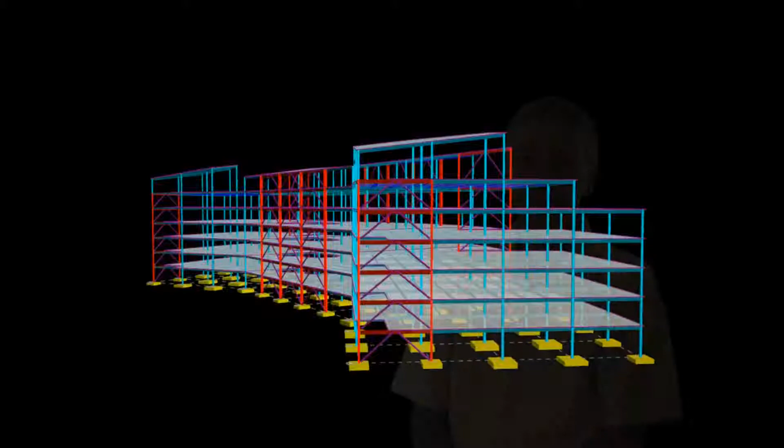I'm Alan Adams, Chief Structural Engineer for Bentley Systems Incorporated. Early in my career I worked for a structural engineering firm where I designed buildings, hotels, offices, parking garages. During that time we founded a software company to design the skeleton of buildings.

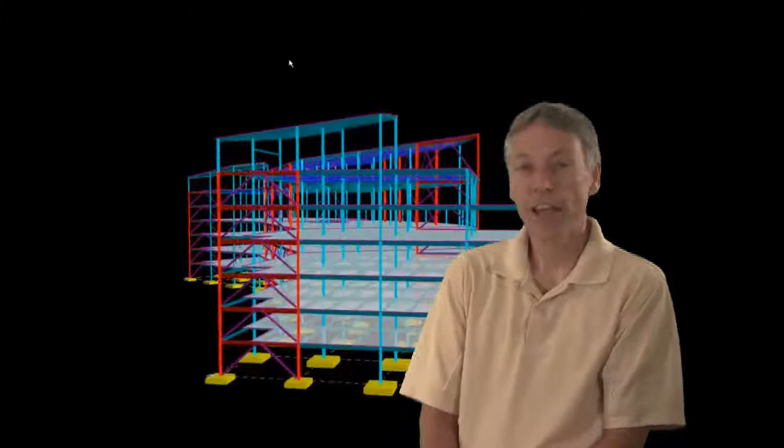It is estimated that over half of the steel buildings built in the U.S. in the past several years were designed using our software. The Vista Courthouse, Vista City Center, and the San Marcos City Center are three local examples, among others, of such projects.

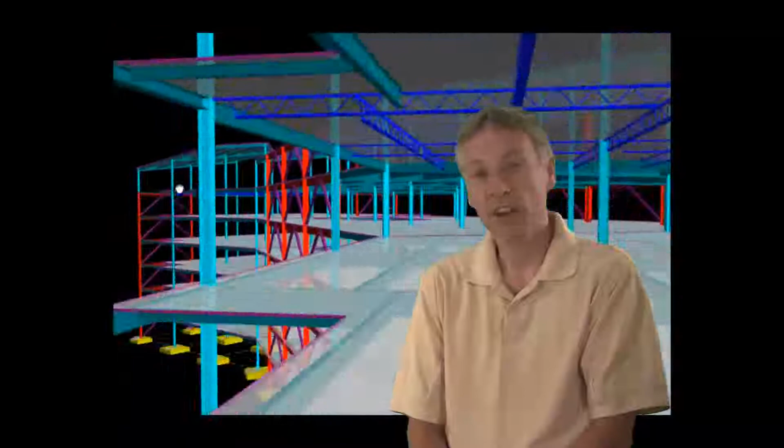It is common practice to build prototypes of new products, toys, tools, even cars, to test and verify through actual use the functionality and correctness of the design and manufacture of the product before that product goes into mass production. If the prototype is found to be flawed, it is discarded and a new, improved prototype created. This process is repeated until the design is acceptable.

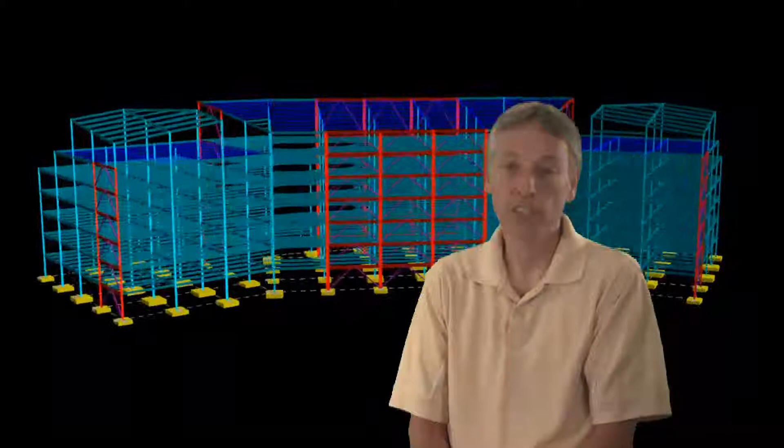It is, however, impractical to build prototypes of buildings. Each building is unique. You have to get the design right the first time. Thus, it is necessary to create mathematical models of the building structure and mathematical representations of the forces that may act on the building. A virtual building with virtual forces acting on it.

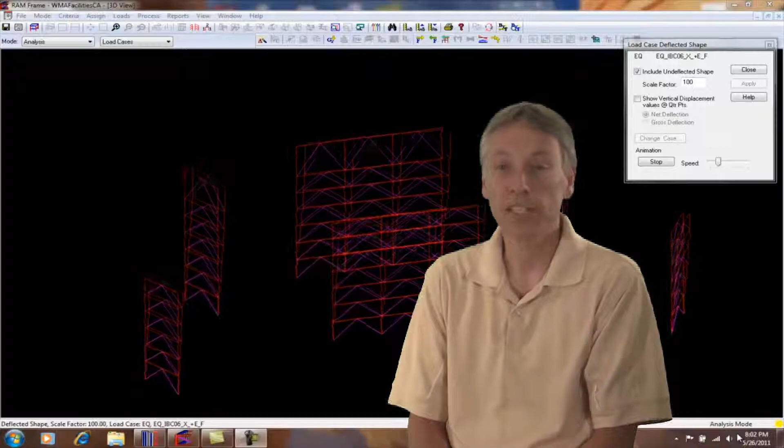Using the seismographic data from earthquakes, geotechnical engineers construct a response spectrum curve, a mathematical representation of earthquake ground motions. These equations are implemented in the software to represent the earthquake forces to which a building may be subjected. Similarly, equations are developed and implemented to represent wind forces, including hurricanes.

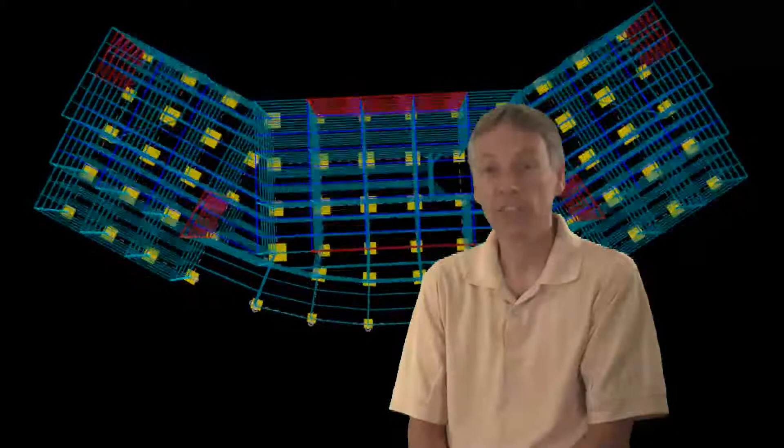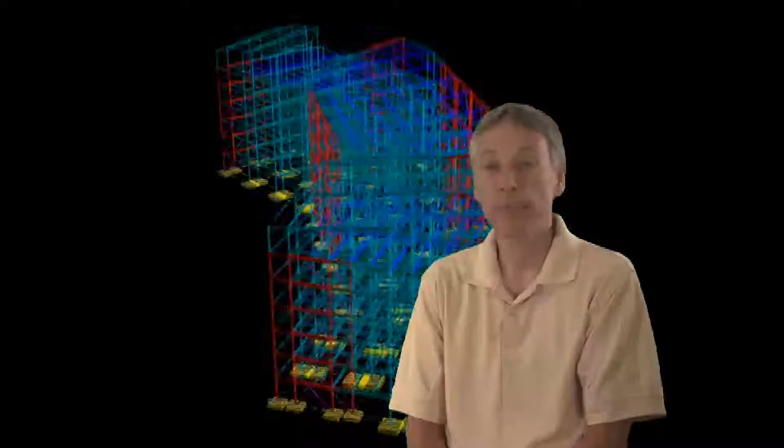Consider the beams and columns that make up the skeleton of the building. These members are represented by matrices and arrays of coordinates, angles, lengths, and material properties, all part of the math language. Through matrix algebra, the interaction of the forces in the support skeleton and the interaction of the members with each other can be determined, performed of course by the computer, since those matrices may have tens of thousands of entries.

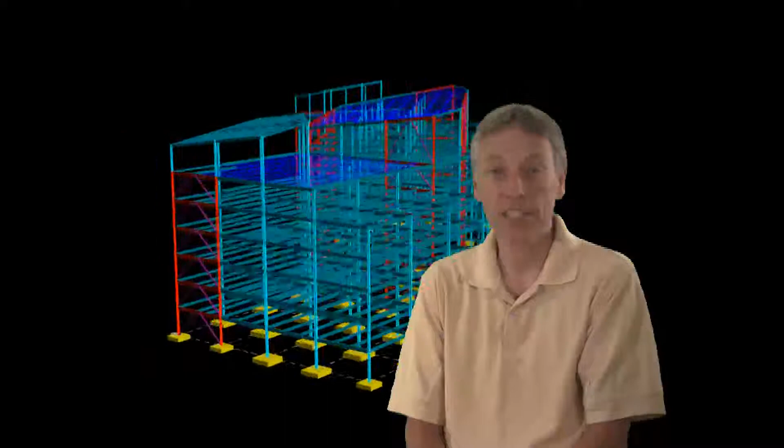Geometry is used extensively to determine member and force relationships and orientations. Equations representing the strength of structural shapes, such as a steel I-beam or a round pipe section, are programmed and used to determine the capacity and adequacy of the design being investigated.

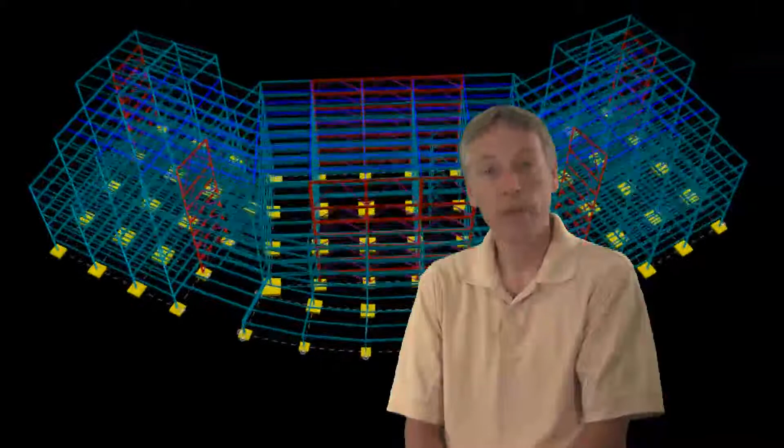Through the use of mathematics, the engineer is assisted in his task of designing safe and reliable buildings, warned when they are not, and given the ability to correct any defects or shortcomings, all before the building is actually constructed. Mathematics, practically applied, is the language of much of what we do as structural engineers.

So whether we're talking about how much money flows in and out of our bank account on a monthly basis, or how long it's going to take to pay off that car once you add up the cost of the car, the tax, the licensing, and if you take out the loan, the additional interest you're paying on top of that.

Whether we're talking about how to build a building from the bottom up, how to make sure that the footings are right for the type of soil we're dealing with, make sure that all the bracings are right, make sure that it can handle the earthquakes that are prevalent in the area, or the winds and the rain, all of the other elements.

Whether we're talking about doing three-dimensional motion capture and collecting hundreds of thousands or even millions of pieces of information, then organizing them so we can bring an animated object to life. All these things and so many more are dependent upon the mathematics language.

As we go through this course, we're going to stop and talk about how all of these different pieces of information get used in the real world. And the benefit you get is that by learning the math, you'll be able to describe many more things in your life, and it'll help you solve many problems.